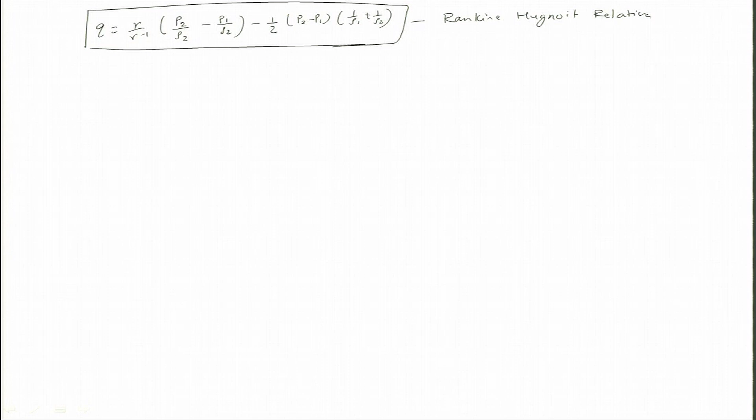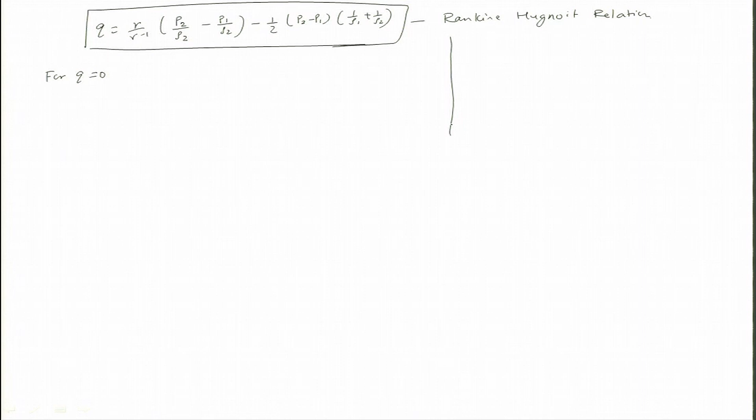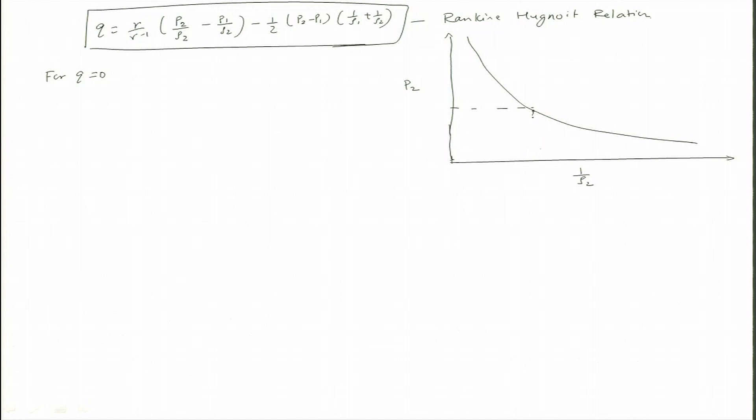And if I take this Q as 0, and if I plot this P2 versus 1 over rho 2 for a particular P1 and rho 1, I will get a relationship like this. This is your P1 and 1 over rho 1, this region, and this curve corresponds to Q is equal to 0, and this is corresponding to normal shock wave, because this is one dimensional, so it corresponds to one side.

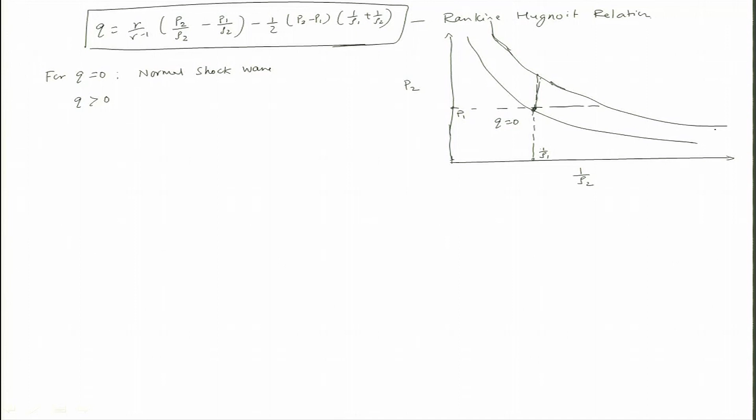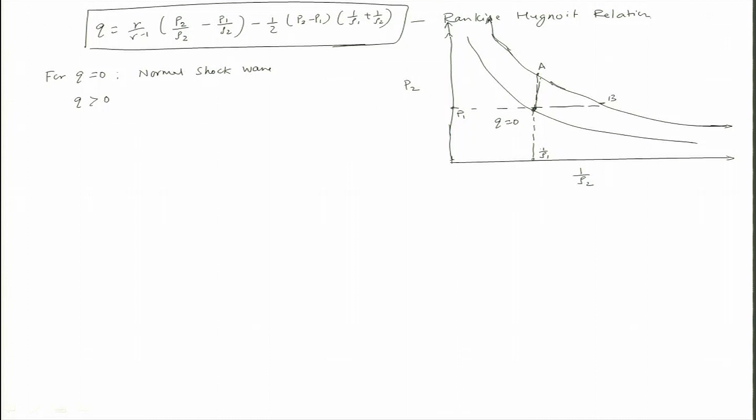But if Q is greater than 0, that means some finite value, then naturally another curve will be coming. Now, if I consider this as my initial point, then it will be like this. I can say this is basically A and this is your B, and this region goes towards very high values, towards infinity. If I consider this case as A and B, there will be other regions.

Let us now invoke the relationship we had derived for the velocity: V1 square is nothing but P2 minus P1 by rho 1 into 1 minus rho 1 by rho 2, isn't it? This is the one we derived. Now, at point B, what is happening? Is P2 equal to P1 or not? This is your P1 to start with, but P2 is here. So, P2 is same as P1 because it is on the same straight line.

That means, from this expression, V1 will be 0. If it is 0, then what will be V2? V2 also will be 0, yes or no? Why? Because V2 square we can write as P2 minus P1 by rho 2 into rho 2 by rho 1 minus 1. So, which is not possible. Is it possible? No.

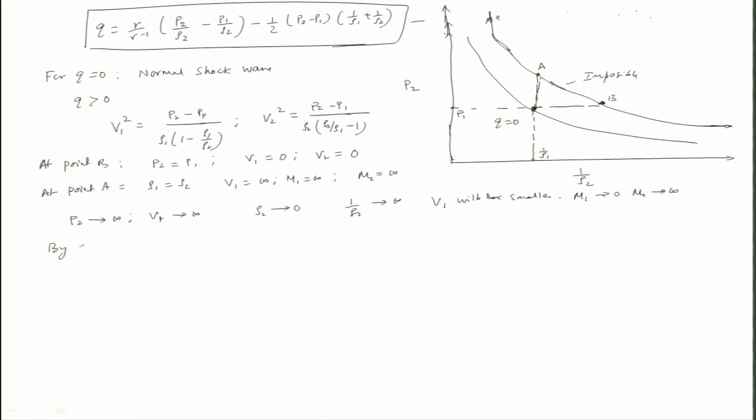So, what we will do now is look at the Rayleigh relationship. From this relation we can get m double prime square equals P2 minus P1 over 1 over rho 1 minus 1 over rho 2. So, if I plot P2 versus 1 over rho 2 from this relationship for a fixed mass flux rate, what would it be? It will basically be a straight line, is it not? Yes or no? It is linear, right.

So, therefore, it will be trying to intersect this Hugoniot curve, this is known as the Hugoniot curve, because we have discussed it from the Rankine-Hugoniot relation. So, if I do that, it will start from here, and it will be a straight line, and this line is known as the Rayleigh line.

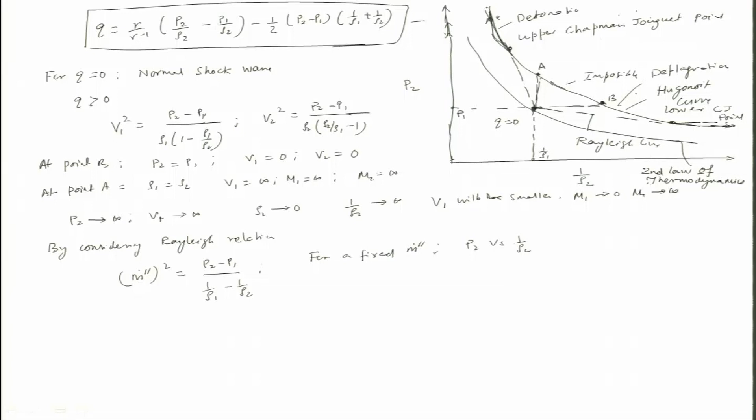And because the entropy will be decreasing, the lower branch is not possible. What we will be looking at now is this portion from A to this region and B to this region, and see where it will be possible, and the various regimes we will be discussing.

So, as I told, just to make it very clear, when the Hugoniot curve is plotted, P2 versus 1 over rho 2, you will get this curve, which I had marked in the last slide as A, and this is your B, and this portion is physically impossible, and this line is basically the Rayleigh line.

And as I told, there will be various regimes here: regime 1, regime 2, regime 3, regime 4 and regime 5. From this point, because it is the tangent point between the Hugoniot curve and the Rayleigh line, it is known as the upper Chapman-Jouguet point, and from here onwards is a strong detonation, which is not really possible in nature, whereas the weak detonation is from A to this region.

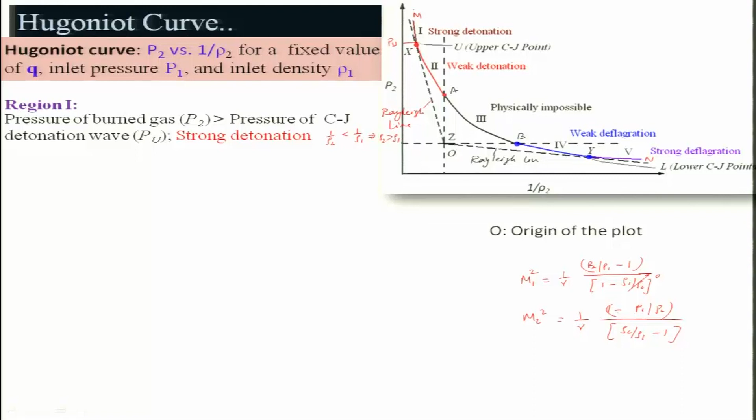So, the Mach number M1 will be very high, and what happens to M2? M2 square is 1 over gamma times 1 minus P1 by P2. Rho 2 is very high as compared to rho 1, and P2 of course is very high as compared to P1, so it will be higher values.

The gas velocity relative to the wave front is slowed to subsonic speed, and pressure and density increase significantly, that means P2 and rho 2. M1 tending towards infinity is rarely observed; you cannot really get the inlet velocity so high. I am talking about this region, from that point onwards. So, it is basically not possible to have this region really observed.

And region 2, this portion: the pressure P2 is less than the pressure at the CJ detonation point PU, which is of course the weak detonation region. And the gas velocity relative to the wave front is slowed to subsonic speed in this region. So, it is really possible, and the burnt gas velocity is greater than the speed of sound.

At the isochoric process, because isochoric means the density is almost the same. In this region, basically density is approximately the same. So, it is possible, but here it goes much higher, and the weak detonation under these conditions attains an infinite velocity. So, this is not possible, as we had seen earlier.

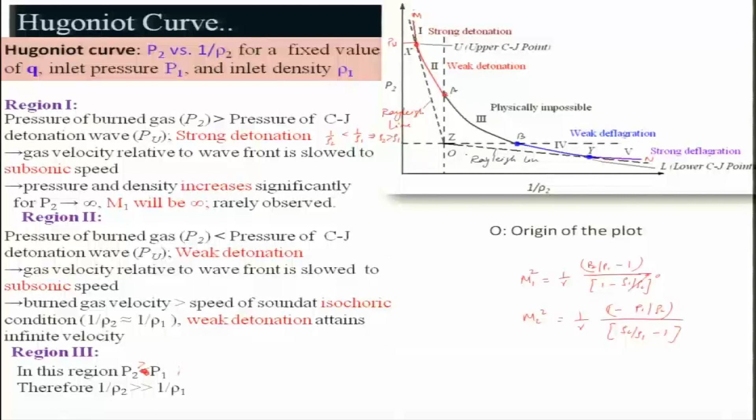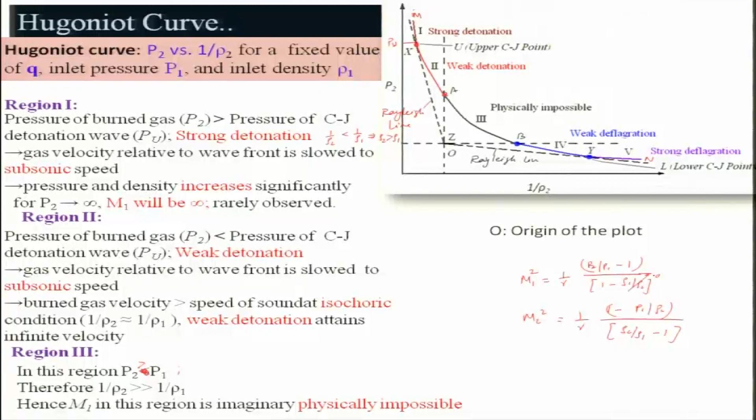And therefore, as I told, M1 in this region is imaginary, because if you look at this case, rho 2 is smaller. If it is smaller, this will be very high values as compared to 1. So, therefore, it is imaginary or physically impossible. So, region 4,

so if you look in between, what is happening in this region, the P2 is lying between PL, this corresponds to PL, and also the P1 corresponds to this portion. And gas velocity relative to the wave front is accelerated, and as a result, this is isobaric, because in the process taking place in this region there will not be much change in the pressure. If you look between this and this region, the pressure will not be changing much,

although P2 is less than P1, and the difference P2 minus P1 is quite small. So, therefore, it will be really possible to have the deflagration; weak deflagration occurs.

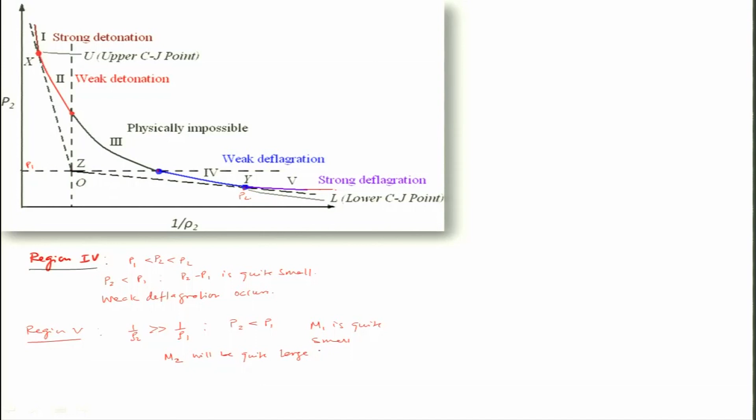The region, in this case, what is happening: 1 over rho 2 is far greater than 1 over rho 1 in this region, from here to this strong wave which will be taking place in this region, whereas the P2 is very less than the P1, because P1 is here and P2 is very less. So, as a result, the M1 is quite small, and M2 will be quite large, which is not possible in practice.

Therefore, the strong deflagration is never possible in practice. Why? Because if the flow is subsonic, like the initial state, you cannot have a supersonic flow without the formation of any shock wave. So, therefore, this is not really possible, and the strong deflagration is impossible to occur in nature.

And keep in mind that we will be basically discussing the weak deflagration. That means the premixed flame is basically a weak deflagration in this region. Actually, this is not possible. So, in between this region, which we will be discussing. Similarly, the weak detonation is possible, whereas the strong detonation is not possible.

Let me give you some values of what is happening in case of deflagration and detonation. If you look at V1 by C1, this is nothing but your Mach number 1; it is very, very low, whereas for detonation it will be 5 to 10, it is very high. Unless it is beyond 4 or something, detonation won't occur. And V2 by V1 is 4 to 6, whereas it is the other way around, 0.4 to 0.7, just opposite. And P2 by P1 is 0.98, you can say it is not changing, approximately equal to 1.

Whereas here the pressure ratio is 15 to 55, very high pressure across the combustion wave. And T2 by T1 is 4 to 16, whereas here it is at a much higher level. And density of course is a small change, but here it is the other way around, it is much higher, 1.7 to 2.6. So, this is the range I am giving, so that you can see the opposite behavior between deflagration and detonation; detonation leads to explosion, and one has to avoid that.

Of course, nowadays people are talking about the pulse detonation engine, using detonation as an energy source, enhancing the combustion process, reducing emissions and also having an engine, but it gives a lot of noise, and that is a bigger hurdle for the development of the pulse detonation engine.

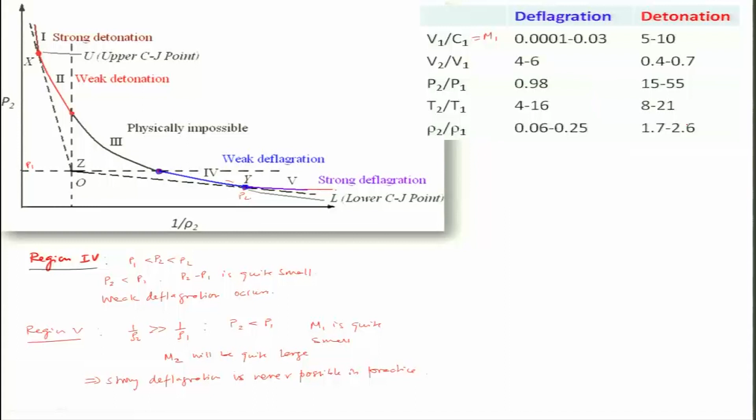We will take up an example in the next lecture to discuss how to handle detonation and deflagration.